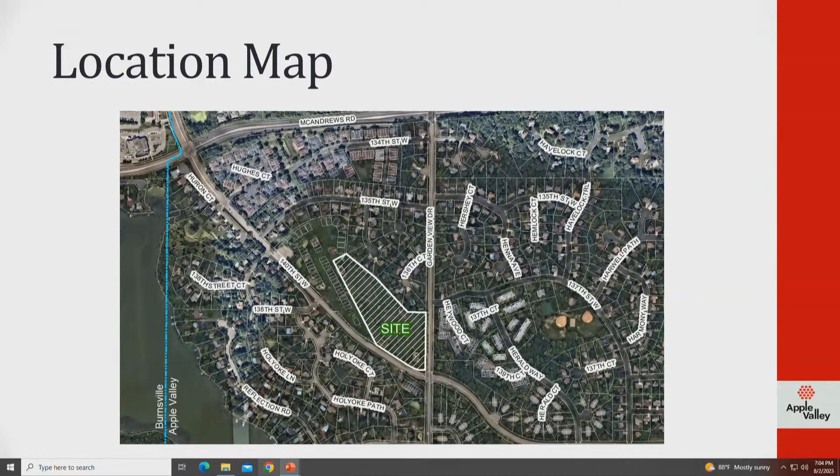Phase 2 is a 10.3 acre piece of the overall Eagle Pointe Apple Valley. It was under the preliminary plat previously approved, but the petitioners are requesting a small change, which is why we're here this evening. The comprehensive plan guides the development for LDF, low density flex, and is correspondingly zoned LDF, low density flex, single family zoning designation.

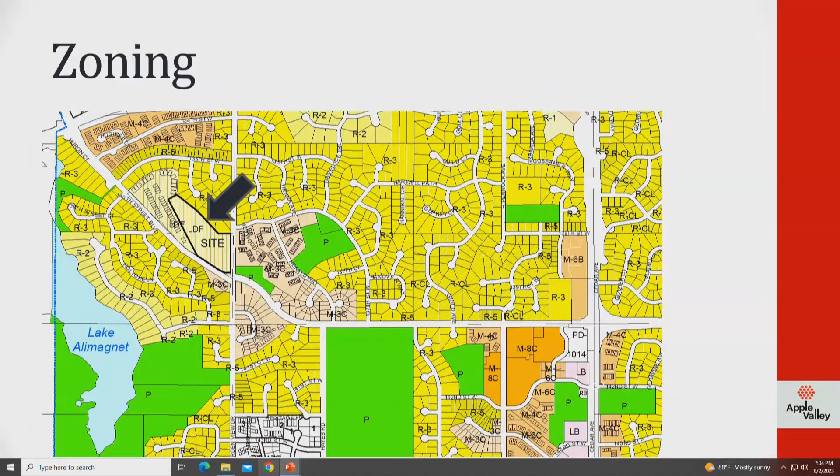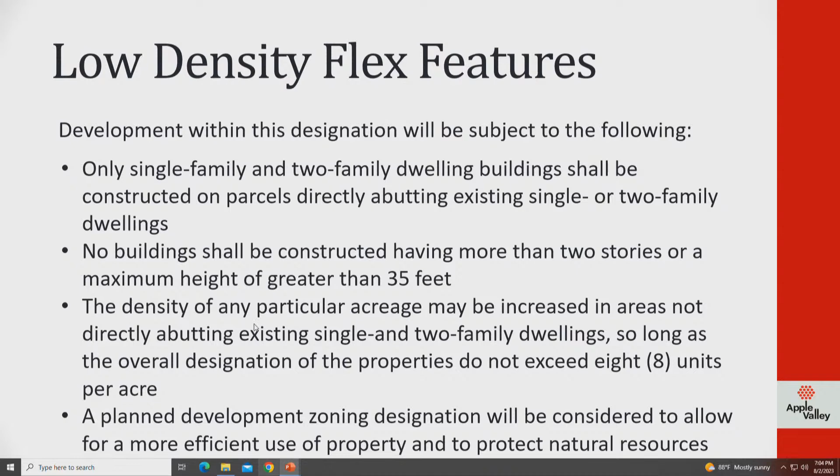The low density flex designation was created to help provide a buffer between low density residential areas and higher density areas, basically by allowing for a mix of housing types. The goal is to help provide buffer and nice transitions between residential districts.

Like any other zoning district, the LDF has setback requirements, lot area, lot width requirements. One of the unique features of this residential zoning designation is that it limits the height of buildings to 2 stories and 35 feet, keeping the height down a bit to make sure it's compatible with surrounding residential areas.

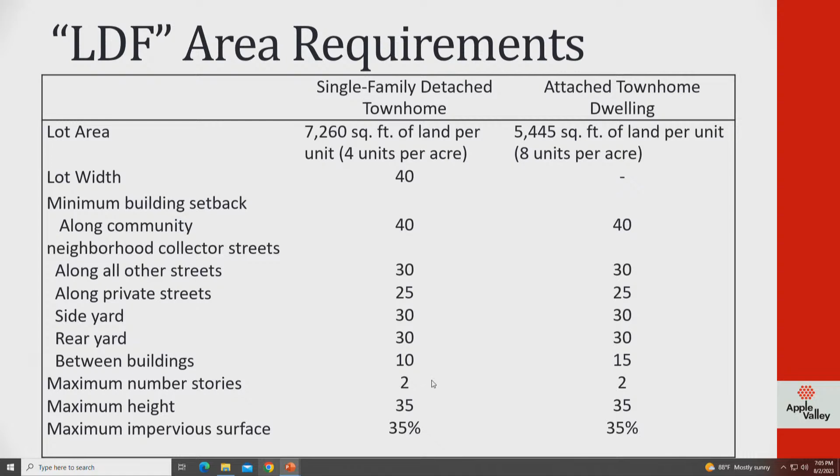Phase 1 is underway right now, under development. Private streets, utilities, and so forth are being installed, and building permits are in for review and should be issued soon if they haven't started yet. So we know the developers are anxious and excited to get moving forward.

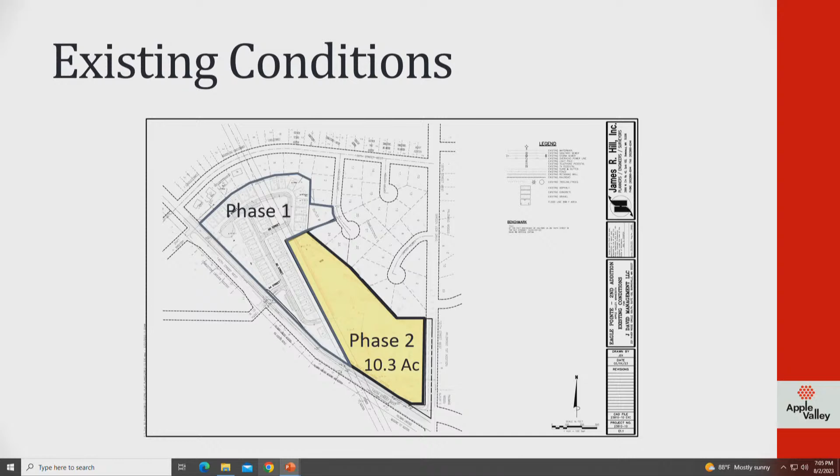When the overall Eagle Pointe Apple Valley development was approved, there were some outstanding design issues that needed to be hammered out. The developer was ready to get moving on half of the development, but not all of it. So what they did is they designed the development without a 3-unit building on the south side. It was outside of the ponding areas. This allowed them to create the ponding and utility connections that were needed.

What they've done now is, now that the ponds are designed, they know how much room is available. They're requesting that the city consider allowing them to add a 3-unit building.

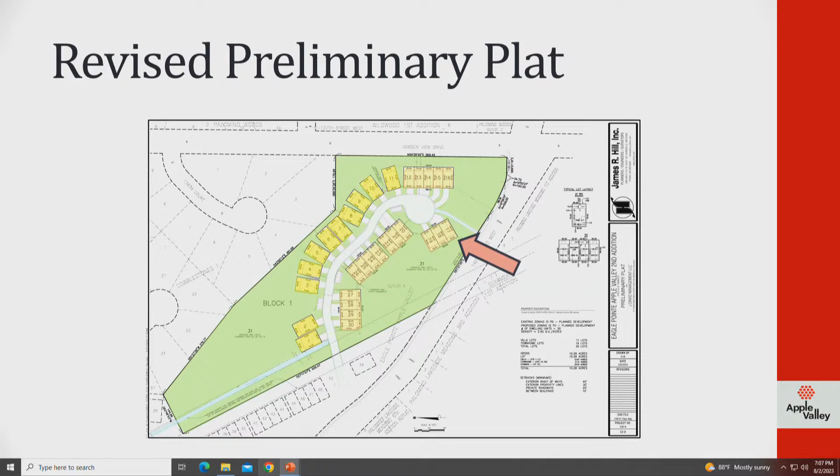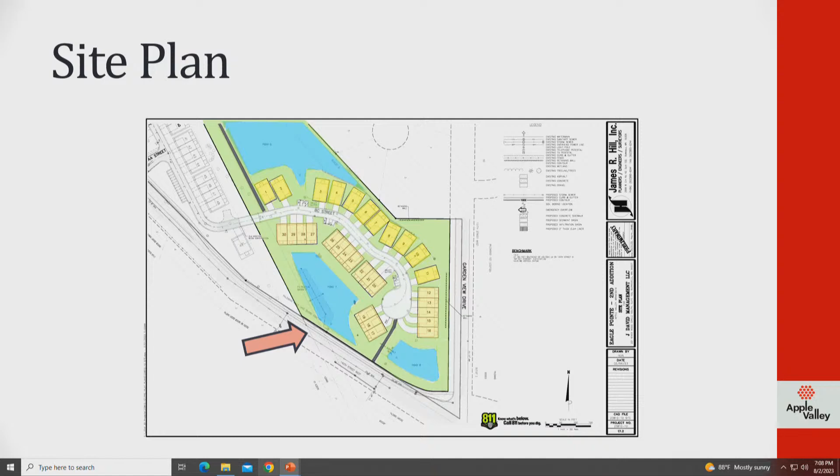Grading and drainage was reviewed by the assistant city engineer. His memo is part of the packet this evening. No significant outstanding issues at this time.

Same with utilities. Those have been reviewed consistent with what was previously approved.

Landscaping in multiple family zoning districts is like commercial development in that the value of landscape plantings are required to be 2.5% of the value of construction of the building. So what they've got is two types of landscape plans.

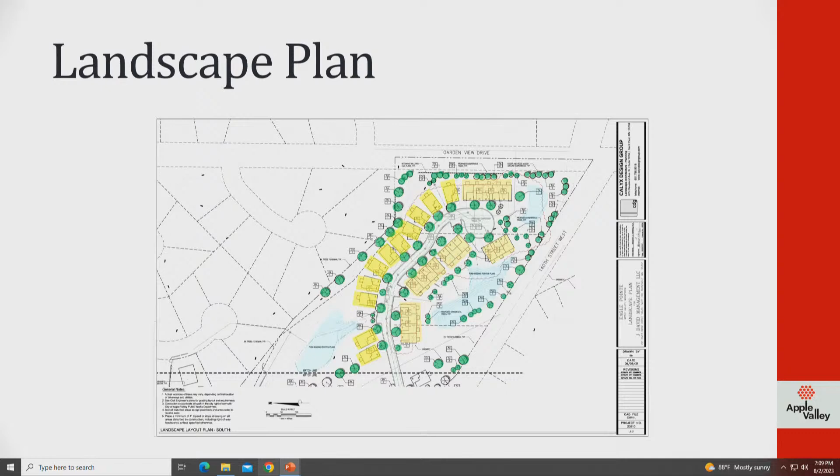One is the overall site layout, and this is the overview of that for the second phase. Natural Resources did review this. The one comment that they did have is that they would encourage the developer to consider more natural plantings. But aside from that, no real significant outstanding issues.

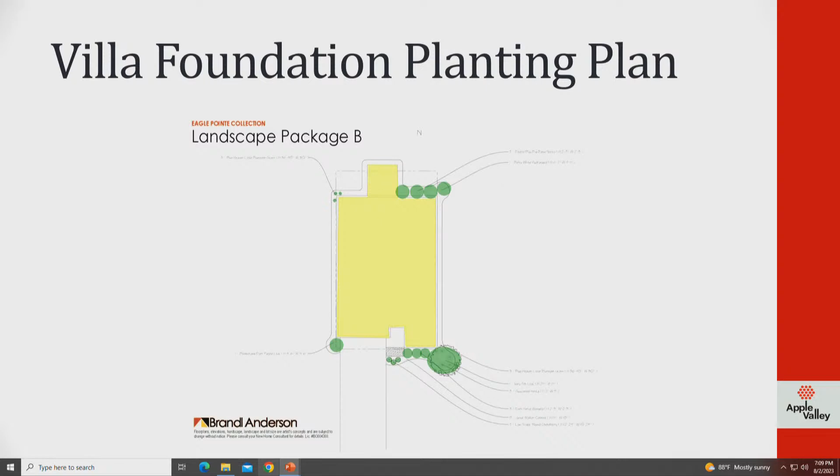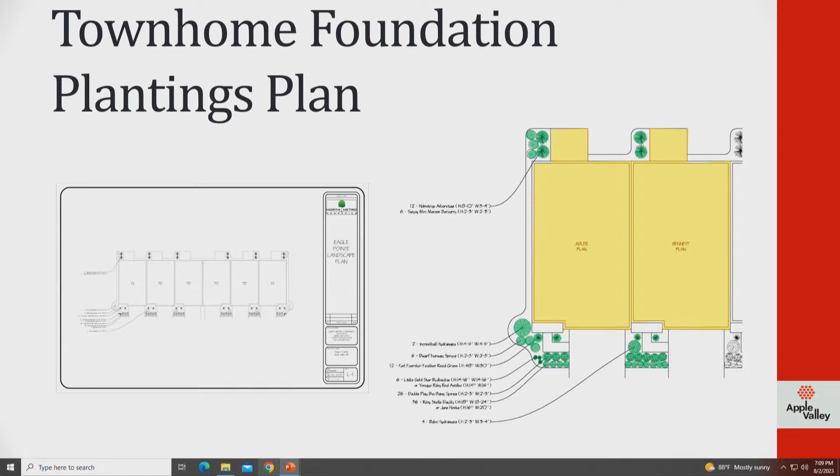Then the villas, the detached townhomes, individual plantings, and this is just one landscape package of 4 that they have on offer as part of their sales. And then the townhome foundation package, similar, a lot of change in and out. A person has a lot to select from.

So moving on then to the elevation drawings. The elevations help to show the exterior design of the buildings.

One of the things that we will need to do is to confirm the height of the buildings. There's no math that helps us to make sure that it doesn't exceed the 35 feet. So that's just something that we'll look for. So kind of a minor detail.

Exterior building materials are mostly LP siding, so lap siding, and then different styles of LP. They're showing board and batten. They're showing just the typical siding. They're showing shakes. So a variety of styles on offer for the buyers. There is a knee wall in the front of the home that is made of cultured stone. So that helps to kind of break up that front elevation.

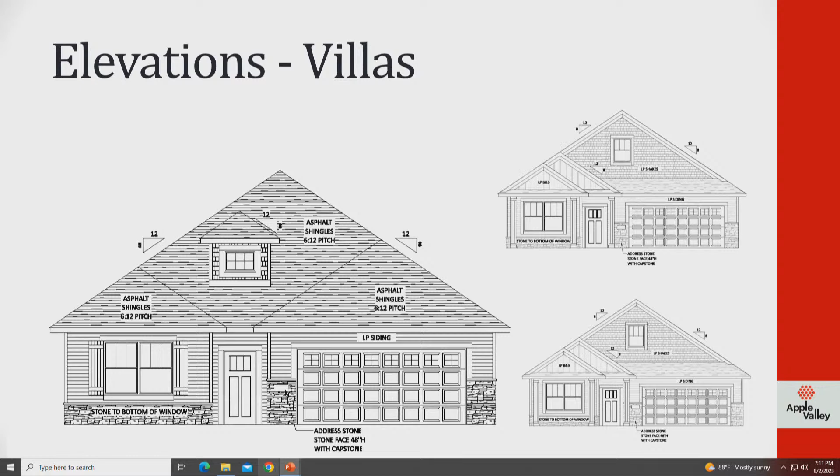Let's see if we can get this thing to go. Come on. There we go.

Side and rear elevations are similar. Primarily the LP, the lap siding is the style that's used here, not a lot of variety or breakup here.

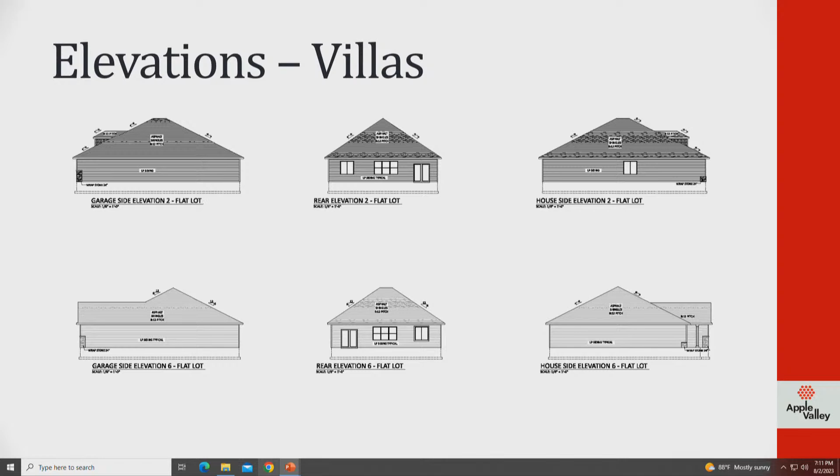And then with the townhomes, here again, all LP products, but kind of in varying designs. And again, they do have the stone treatment in the front of the units, the front elevation, but not carrying it through to the side or the back.

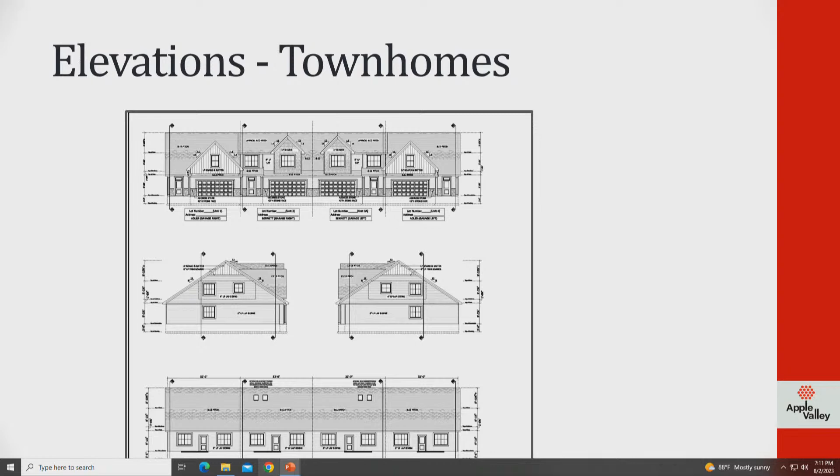Summary of issues, a few minor outstanding items yet to be discussed. Number of visitor parking spaces needs to be increased from 12 to 15. Visitor parking spaces are currently 18 feet, need another 6 inches on those.

No big deal. Height of the villas needs to be verified. Right now it looks like they're in the 30-foot, maybe 32. I don't think they exceed the 35, but we will need verification for that.

And then last, the petitioners are requesting a variance from the exterior building materials requirement for buildings 12 through 16 from code 155346, and I'll go through that real briefly here.

So in the code 155346, the exterior building elevations, the city code requires that multiple residential buildings adjacent to R zones or occupied M zones shall have a vertical exposed exterior finish of at least 50% non-combustible, non-degradable, and maintenance-free construction material, such as face brick or natural stone.

So this is a requirement that we've had for many, many years, and what it does is for transition of neighborhoods, for view as you drive around the neighborhood. It just helps to kind of break up the appearance of the buildings. But I should note that it does state at the end, with the balance being a non-manufactured natural construction material such as plank, cedar, or redwood, which we haven't seen in many, many years.

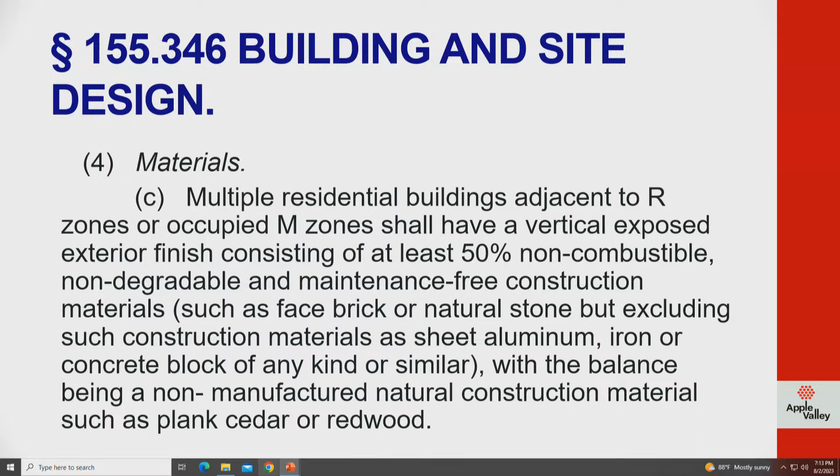So the petitioner is pushing back a little bit, concerned about, well, what is it you guys are really trying to go for? Are you going for fireproof? Are you going for brick? What's your goal? So we need to spend a little bit more time and kind of review this and look at it. But what ends up happening is one of the 4-unit buildings meets the criteria for needing this treatment.

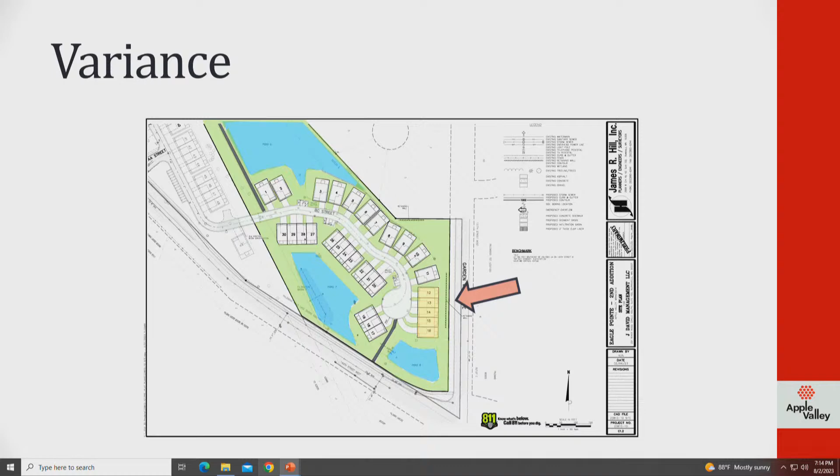And the petitioner is asking for consideration to not have to do that. And again, the townhomes, that front facade, they do show that the knee wall in the front, but then the sides and rear don't have that treatment. So that's something that we'll need to discuss in more detail.

So with that, Madam Chair, staff is recommending opening the public hearing, receiving comments, and closing the public hearing. And I'd be happy to stand for questions if there are any.

Commissioner Scanlon: Madam Chair, Kathy, remind me, is this public or private streets? I don't recall from when we last worked on this. Internal streets are private. So as a private street, how are those set up for parking? Are they not designed for street parking? That's correct. The street width is 28 feet face to face.

What the city engineer and city planner at the time reviewed and considered was not allowing on-street parking at all, because of the width of the street and the fact that there's one access point into the development. So the only visitor parking available is driveways and these parking islands, the break-off areas. There are like 3 of them currently? I counted 12 total.

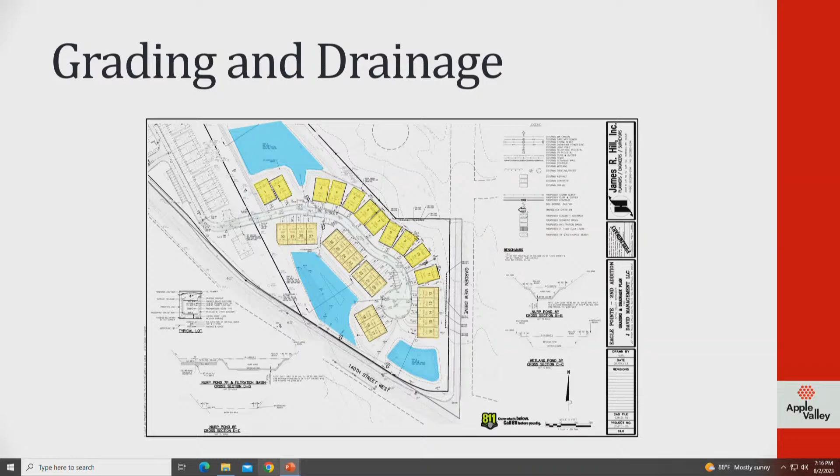So we just need one more grouping. I know living in a newer neighborhood where there's parking on one side of the street, it becomes an issue. All it takes is one person having a party, people not following the parking rules, and then egress for emergency and fire becomes very difficult. So having those extra parking spots, it's going to be important to figure those out.

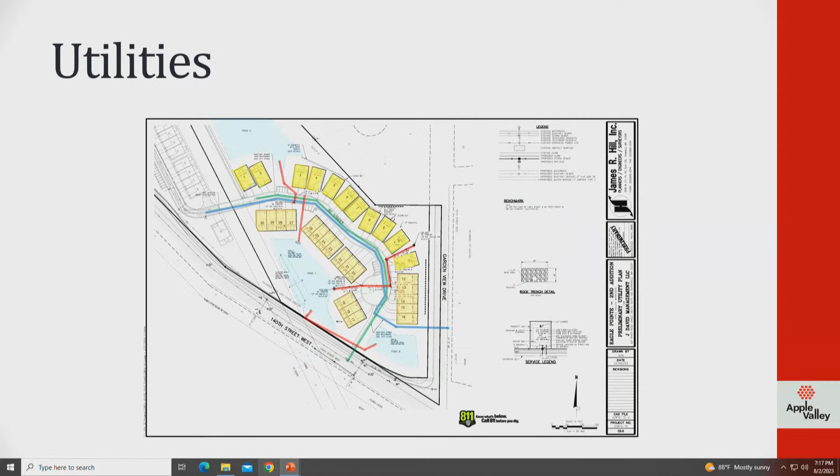Moving on, what's missing on the combustible materials for units 12 through 16 on the end? The concern, basically the way we have interpreted this, is we would like to see this treatment repeated along the side and back of the building, the knee wall.

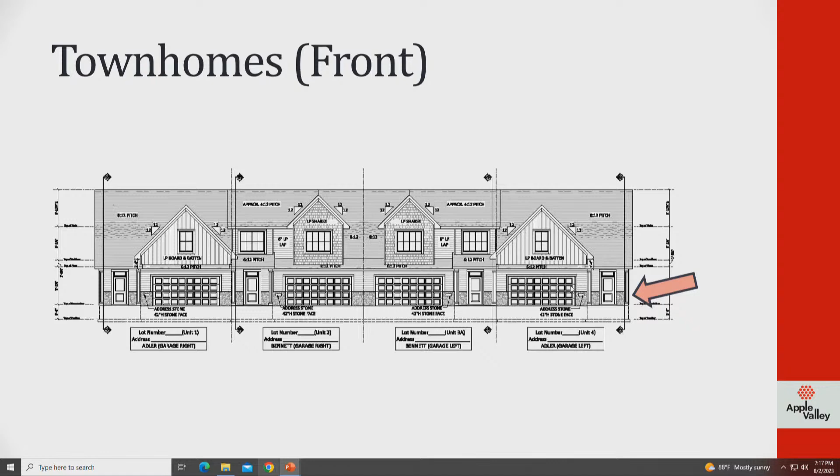The petitioner is here this evening so he could speak to more of their concern. It would be different since it's the only building out there that would have that treatment. But staff finds that it does help to break up that facade a little bit, giving it more interest and texture.

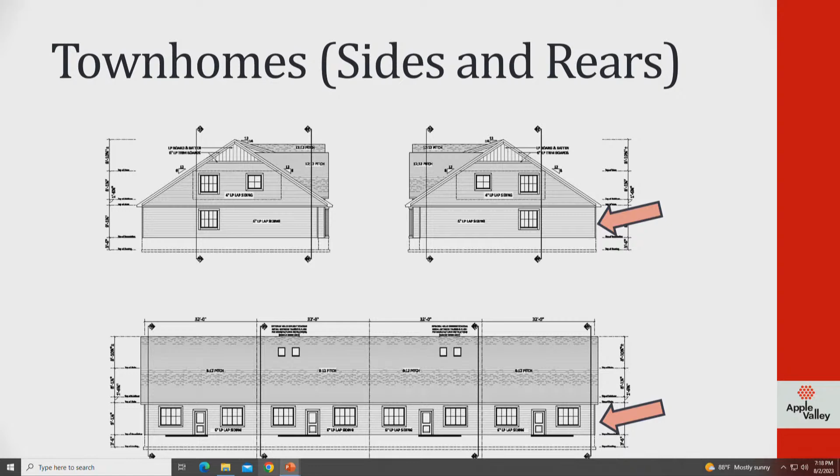I wouldn't be in favor of a variance because that's just going to open up things in the future for us. That's going to come back. I think that's something they just need to work through. The ordinance is there, it lays it out. Up to this point I don't recall ever having to put a variance on this, so no, and the importance and the reason why it's there. So, those are the comments I have.

Kathy, I have a few. First of all, why am I thinking porches? Didn't we discuss that before with something about a seating arrangement in the front, or was that in phase 1? Does anybody else remember that? Porches, could it be related to the villas? I don't know, I'd ask the developer.

I think it's very important to verify the height. I don't think that's likely, but I think that's important because that was a big part of our discussion, the height, the low density and everything.

And then I'm going to hit on adding 3 more. Can we discuss that? Yes, absolutely. I'm not for it, I think we've already been there, done that. That ship has sailed as far as I'm concerned. I hate to open up that can of worms again, to go through this all again. To me this is a done, sealed deal. It's my opinion, but it should have been figured out before it was brought to us the first time, is my thing on it. Anybody else?

I would like to make a comment I haven't yet. Overall, the number of units for the whole development goes from 77 to 80, and that brings the density from 4.0 units an acre to 4.2. So it's still pretty low, in that 3 to 8 units an acre range, and I respect that. I'm just looking at the resident side of it, how we kind of came up with this to please everybody. To me now, we're adding some things that wasn't fair to the residents, to bring that up now instead of at the beginning. It should have been brought up at the beginning, is my thing.

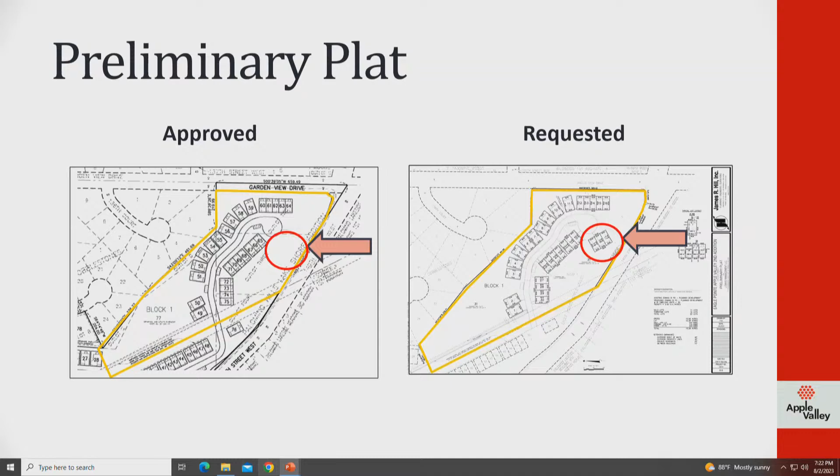I'm hearing what Madam Chair was saying too, and I look at this also - that goes to my concern with parking. Especially when you look at units like 5, 5, 6, 7, or any of those in between the parking areas, there's no easy parking access to those. Not that putting it at the end is going to resolve that problem either, but...

Okay. Thank you, Kathy.

Commissioner Schindler, any comments? Madam Chair...

Would there be, is that still, the distance from 140th still appropriate? Yes, yep, it still meets the setback requirements.

I don't like when stuff's added at the last minute, kind of like this type of thing. I guess I'm wondering why that wasn't planned on the front end. But I mean, it's set up pretty much the same way. But...

Yeah, and we can bring back information on that, kind of the timing. I know the city worked with the developer on the design of some of that ponding, because some city water uses those ponding areas. But we can ask the city engineer to give more information when we come back.

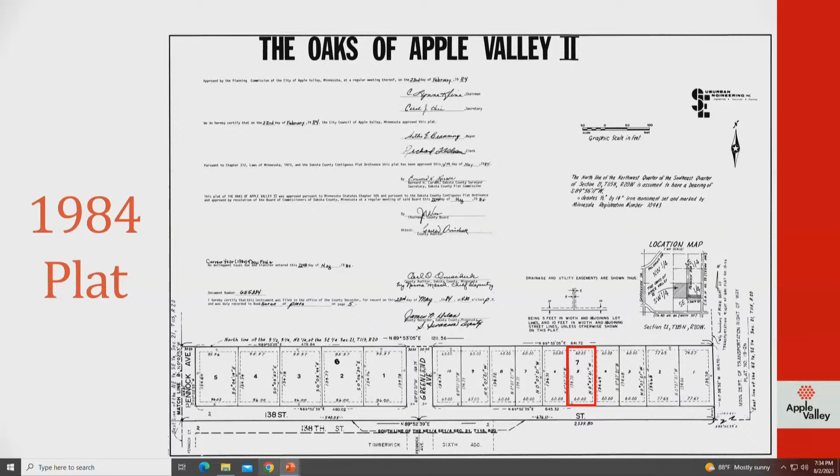I do want to point out that on other corner lots, you do have a significant setback when they were planned for it. The reason I'm emphasizing that is because the Oaks of Apple Valley Second, where this lot was platted, was done in 1984. In 1984, this lot, highlighted in the red box, Lot 5, Block 7, was anticipated to have an additional partner lot where the duplex lot would be located. So if we go back to here, it was anticipated to be like these 2 units, essentially.

However, in 2005, Valley Oaks Estates came through, and when they did so, they put in Gossamer Way. Gossamer Way essentially removed a 60-foot wide section of what was an R5 lot and turned it into the right-of-way for Gossamer Way, removing the partner lot for this lot. Doing so turned this into a corner lot.

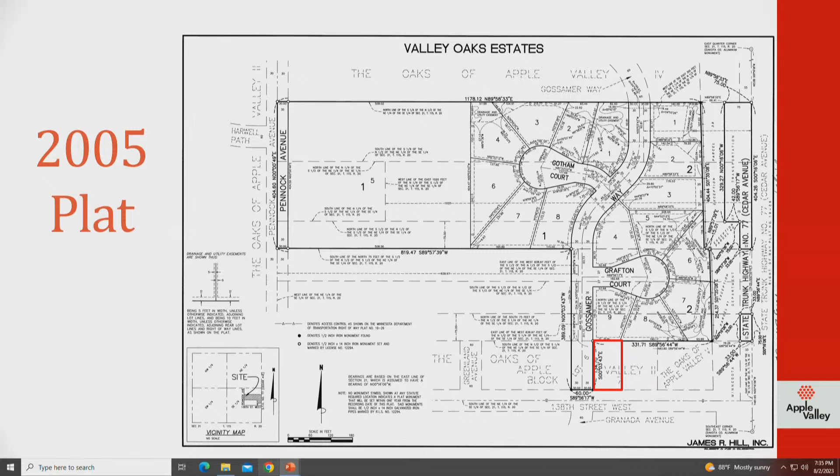In 2019, the property went tax forfeiture and was up for auction. At that time, staff created a handout, which you are seeing an excerpt from here, that essentially was distributed to all potential buyers of the property, stating here's the build area required by code in the red box, and the yellow box was a staff recommended 10-foot variance. By staff recommended, we didn't mean that it was a guaranteed approval by any means, but it was a staff recommendation that if you come forward or purchase this lot, that you...

...submit an application for a setback variance off of that side. The primary reason for this is that with the 7.5-foot setback off the eastern side and the 30-foot setback off the western side, it allowed for a 22.5-foot wide building pad area. Pretty small in terms of most of our building pads. A 60-foot wide lot is already relatively restrictive.

And then when you consider the fact that our most prolific zoning district, R3, a single-family zoning district, allows for a 20-foot street side setback, where this would be suggested at being at, and this being a single-family home, it seemed to be a good parallel that this lot would also receive a similar provision as the R3. I would note that the R3 zone is 25% of the community, and so there is a fair amount of land that would have this same 20-foot setback rather than the 30-foot setback required by the R5.

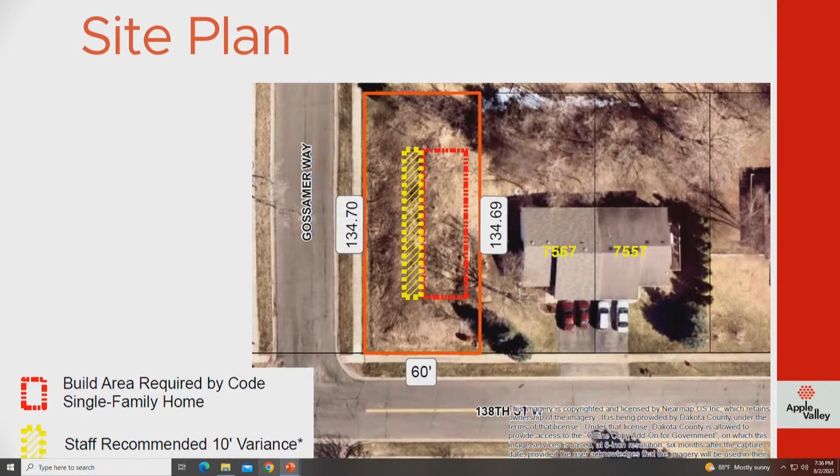This creates a difficult lot to develop on. The grades on the lot are certainly challenging, and we want to work with the developer to do so, but there are issues where we would have concerns at a building permit level with this. We do not feel that they pertain to the variance, however, because the variance would stand even if the orientation of the home were to come off of Gossamer Way.

So you have a draft resolution in your packet that includes a provision that the final site plan be approved by the community development director, or their designee, which would happen through a site plan or building permit application anyway. In the meantime, we will be working with the developer to ensure the lot meets all other provisions—sewer connections, driveway grades, ensuring there's a backyard. These are concerns staff has expressed that we'll continue working on, but we want to move forward so the lot can begin those steps if the variance is approved this evening.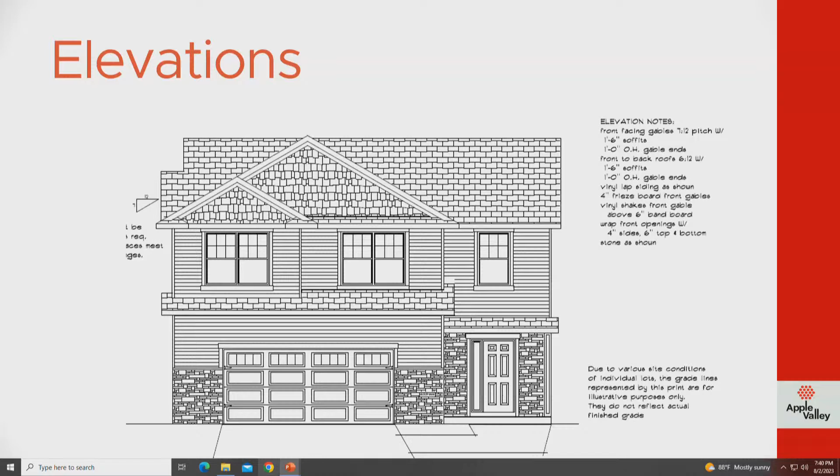At building permit time, I believe they are required to show the correct elevations. A representative of the developer is present this evening if you have any other questions. Otherwise, I stand for questions as well.

Alex, can you go back one? Yes. One more.

So I see that lot is much higher than the next lot. Yes. So are they going to bring it down a little bit? I wouldn't want a house overlooking me that high, so just curious. Chair Kurtz, there may not be the ability to fully bring it down due to the depth of the sewer in the roadway. So sinking this lot is what they were looking at, shown on that survey with the U-shaped retaining wall. That in itself will present difficulties regarding how much yard is usable.

Are they creating drainage issues for a basement? There are a number of issues that don't necessarily pertain to the variance itself that make this a challenging lot to develop, but one with some opportunities. So I think a consideration for us is what this does to the neighboring lot—we want to make sure it doesn't push stormwater drainage into that lower lot. Right, but those are all code provisions we can rely on to make sure they are met, rather than the variance directly pertaining to any of the drainage issues.

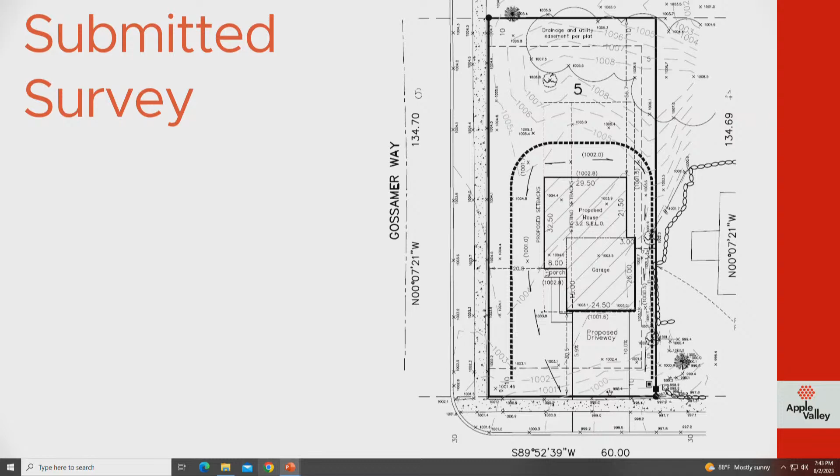All of which really aren't part of our discussion tonight. That's correct, it's mainly about allowing for the setback variance. There's a number of challenges here that are kind of outside our scope. Chair Kurtz, Commissioner Scanlon, the question comes down to, do they relate directly to that 10-foot setback variance, or would that variance be affected by those grades? Staff's recommendation is that because the lot is constrained, and those constraints aren't created by the grades, they are essentially two separate issues.

As far as the setback, I'm not overly concerned with that. It's just that the city has already had a concern with this U-shaped wall system to make a pad for the house to sit on, and what that means for the neighboring properties. There are some significant challenges into developing this.

Last question, is there a preference from the city's perspective on how this is developed from the front of the house, being a corner lot? Chair Kurtz, Commissioner Scanlon, the front by code is off of 138th. I believe engineering has looked at trying to orient the home potentially off of Gossamer up in this direction.